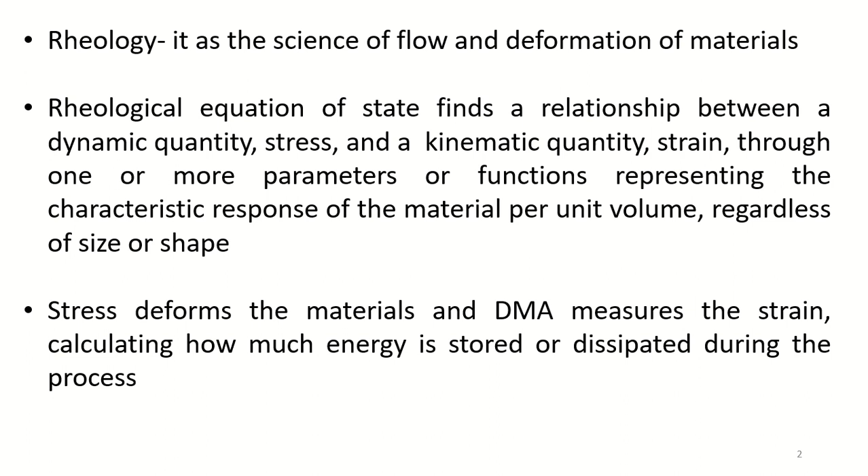Dear student, so far we have discussed some of the important aspects of dynamic mechanical analysis, in which we studied about rheology, believed to be the science of flow and deformation of materials. Then we talked about stress deforming materials, and DMA measures the strain, calculating how much energy is stored or dissipated during the process.

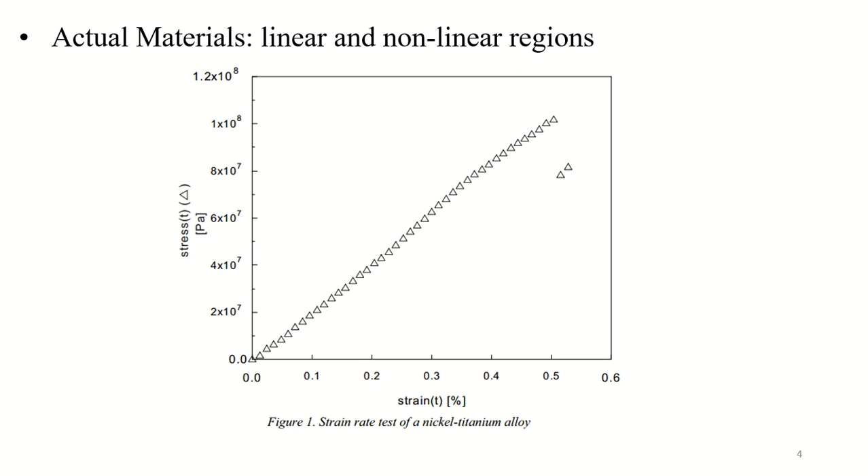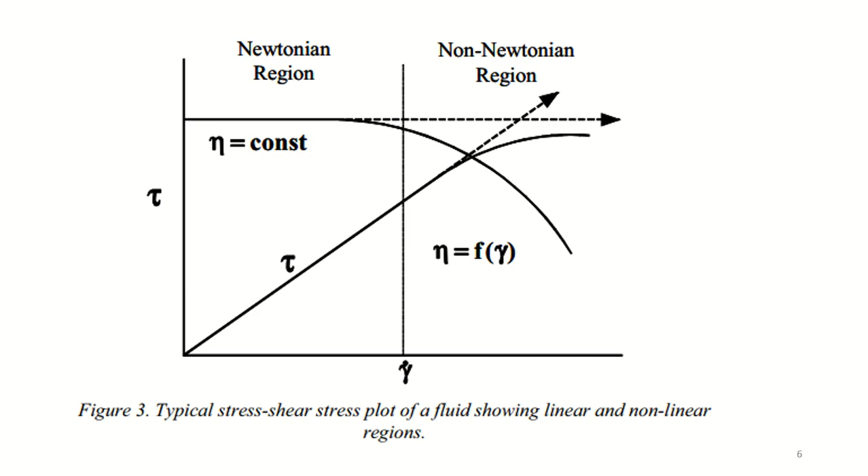In the last lectures we also talked about actual materials and linear and non-linear regions. Moreover, we saw some examples of thermoplastic polymers and typical linear and non-linear regions, non-Newtonian time-independent liquids, and non-Newtonian time-dependent liquids. Both of these terms were elaborated in previous lectures.

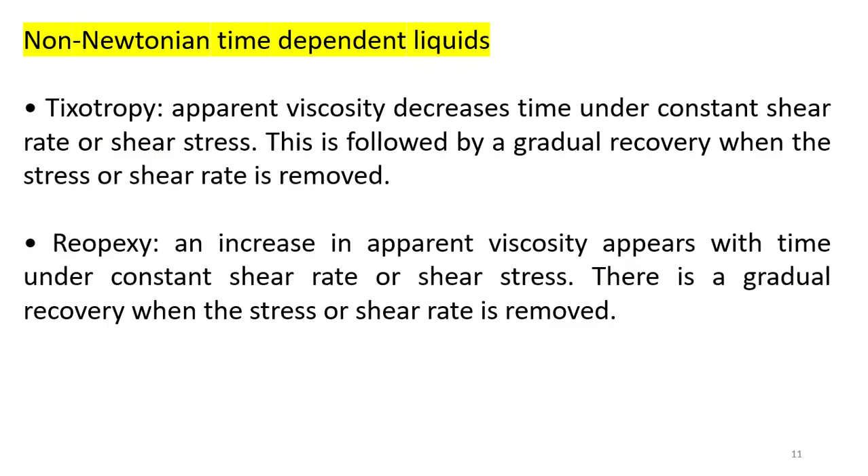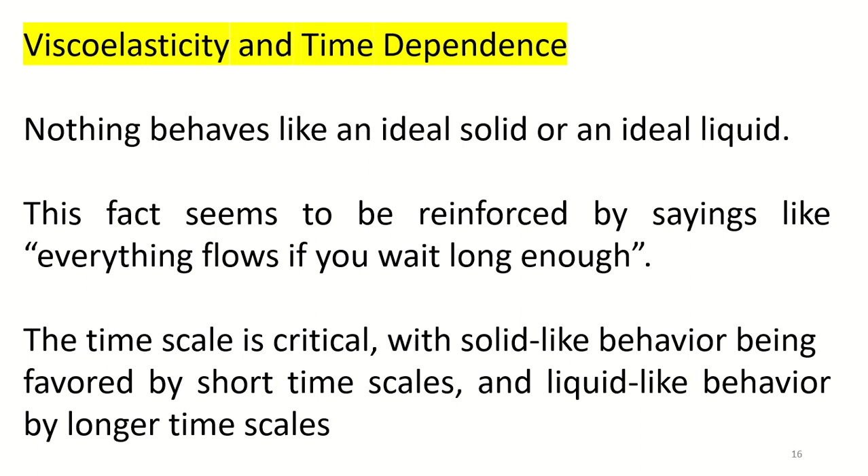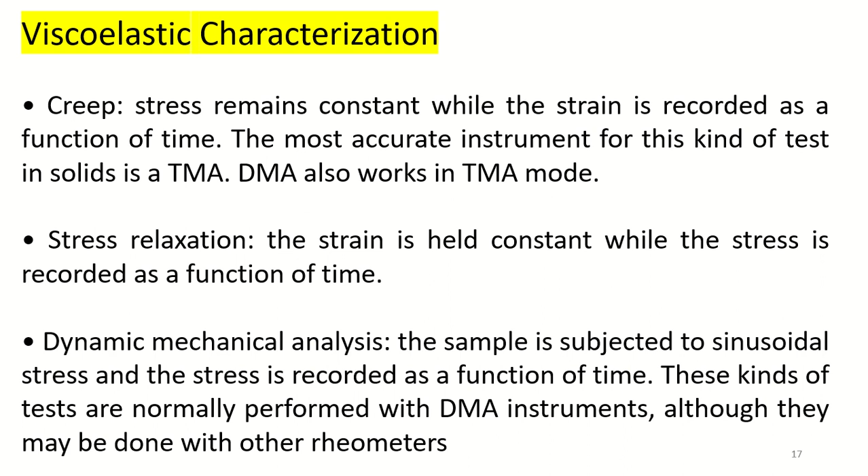The important one was viscoelasticity, which was discussed in detail, and then we talked about viscoelasticity and time dependence. In viscoelastic characterization, we studied many important terminologies: creep, stress relaxation, and dynamic analysis.

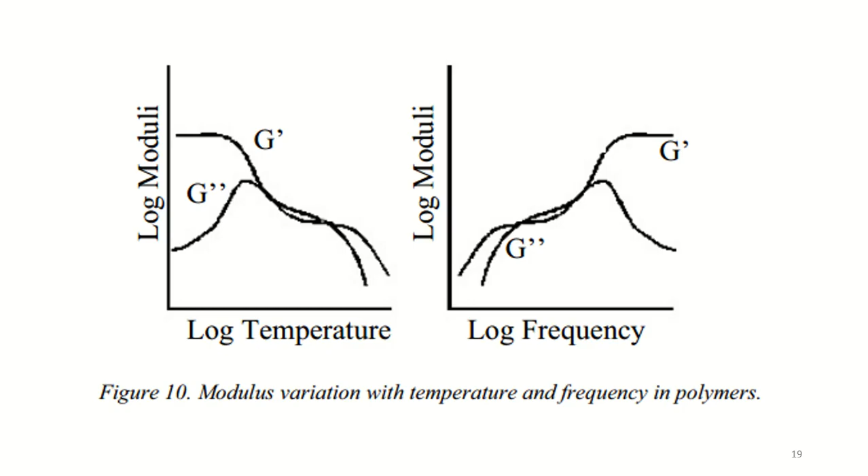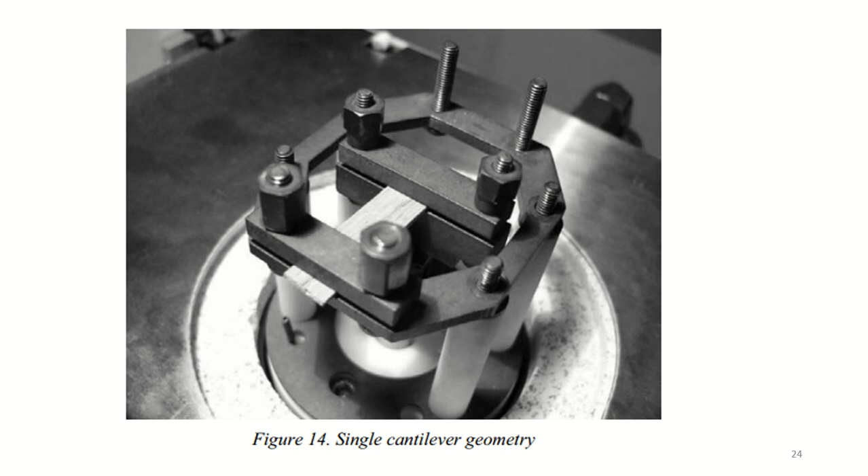Then we also talked about time temperature superposition and principles of dynamic mechanical analysis, in which we studied some instrumentation and other geometries of DMA, along with different structural aspects of the instrument, their working, and the principles behind their working.

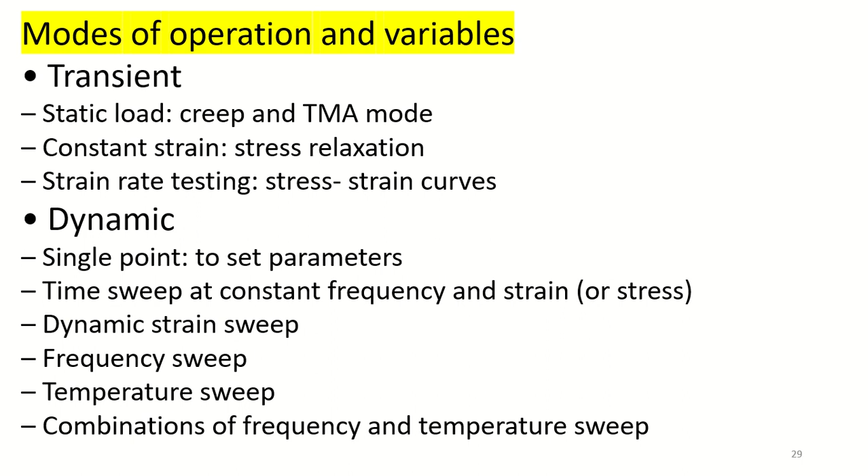Dear students, we also discussed some of the modes of operation and variables in dynamic mechanical analysis, in which transient and dynamic are most important, and we studied a lot about it.

So now we are talking about choosing the magnitude for the control parameters.

Dear student, sometimes previously gathered information may help us choose the experimental conditions for analyzing new material, so it is very important. Sometimes the previous information gathered from different sources may also help us choose the experimental conditions for analyzing new materials and for performing new experiments in the same field.

In any case, the experimental setup should take into account what parameters have to be known about the material and what the physical form of that material is. So we should be aware of the different parameters of the materials, whether physical or chemical.

So the previous knowledge and experimental information may be quite helpful for analyzing new material, and may also help us find a new route for the synthesis of any desired or targeted compound. So the knowledge of previous experiments is quite important for the discovery or new exploration of materials.

Once the geometry and operational mode have been chosen, and it is clear which parameters are of interest, it is necessary to set up the magnitude of the controlled parameters. This is especially true with dynamic mechanical experiments where one parameter should be kept constant. We should be aware, before performing the experiment, of the magnitude at which that parameter should be kept constant.

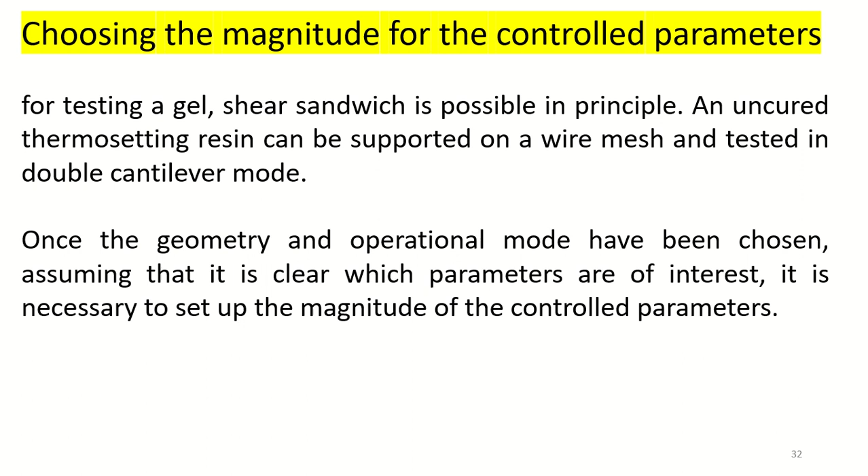To illustrate the problem, consider the case of a dynamic strain control temperature ramp test. The range of temperature of interest is constrained by the instrument's highest limit, along with the sample's features, such as its melting point. The other two magnitudes to set up are frequency and strain amplitude. We should keep in mind the instrument's temperature range, the pressure it can bear, as well as the sample's features, which most of the time means the melting point of that particular sample.

Before performing the experiment on dynamic mechanical analysis, we should keep in mind both the limitations of the sample as well as the instrument.

It is a good idea to perform two quick tests at room temperature to choose these magnitudes: a dynamic strain sweep and a frequency sweep test. The first is the dynamic strain sweep test.

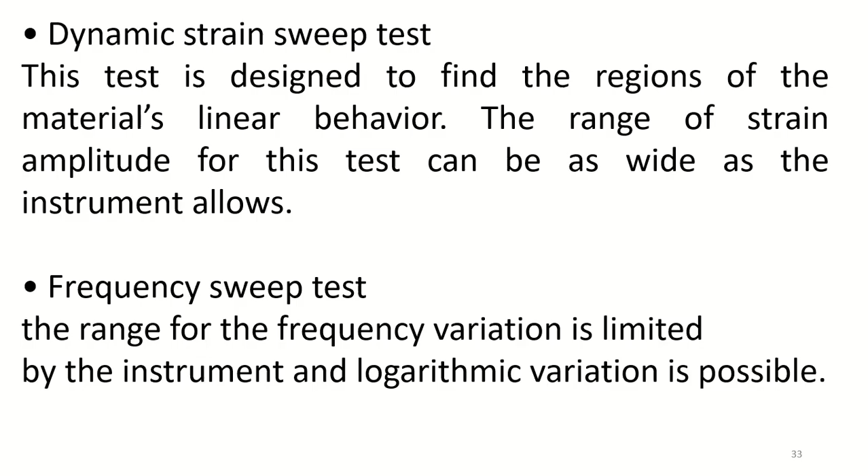The next topic is interpreting phenomena. Polymers may show several relaxation transitions along the temperature range that can be detected by dynamic mechanical analysis. These relaxation phenomena are usually characterized by a decreasing step in the storage modulus and a peak in the tan delta curve. All of these are frequency-dependent phenomena.

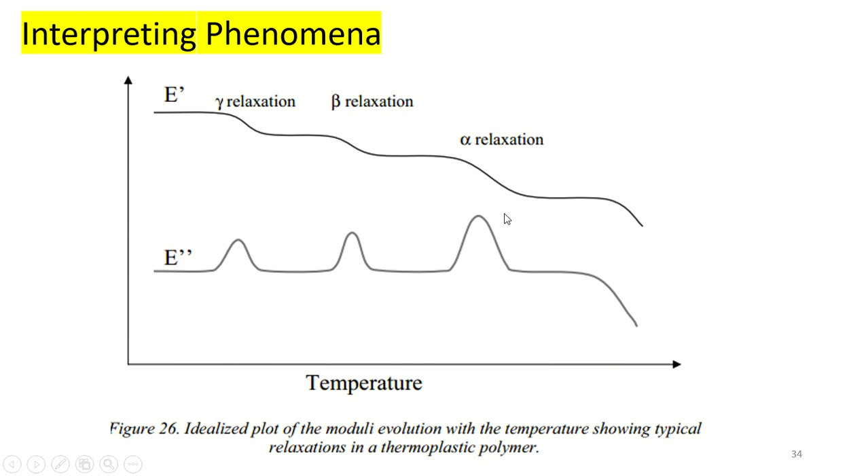Figure 26 provides an idealized plot of the storage modulus and loss modulus for a thermoplastic polymer, while figure 27 reveals the effect of an increase in frequency: a shifting of the transitions to higher temperatures.

The transitions are normally denoted by Greek symbols, which may start from alpha for the transition closest to the apparent melting process.

In the case of some crystalline polymers, it is not clear which transition corresponds to the glass transition, since certain relaxation phenomena involving chain segments or slippage between crystallites may happen inside the crystalline superstructures. At temperatures between Tg and Tm, these strongly affect the properties within this temperature range. So the sample shows multiple phase transitions, and we are unable to distinguish which transition should be the Tg, or glass transition.

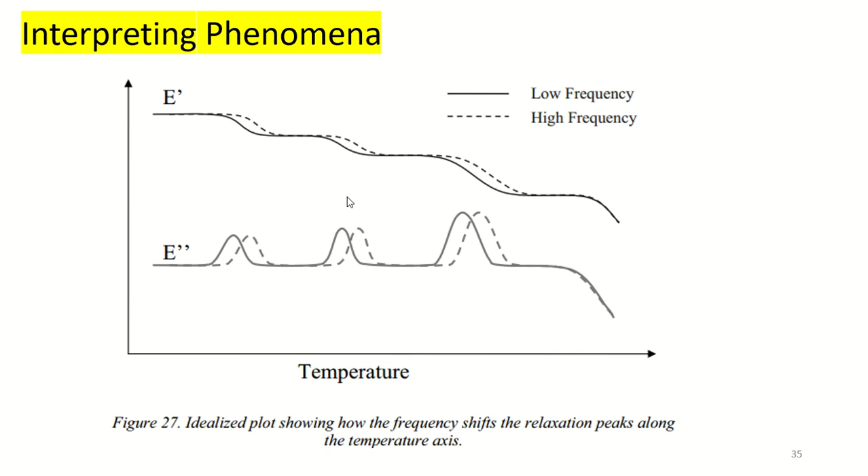Now let us talk about the applications.

Determining the mechanical properties such as storage modulus, loss modulus, and loss tangent of materials over a spectrum of time or frequency, as well as temperature. Although there are many quantities which can be determined by dynamic mechanical analysis, knowing any two allows one to calculate the remainder.

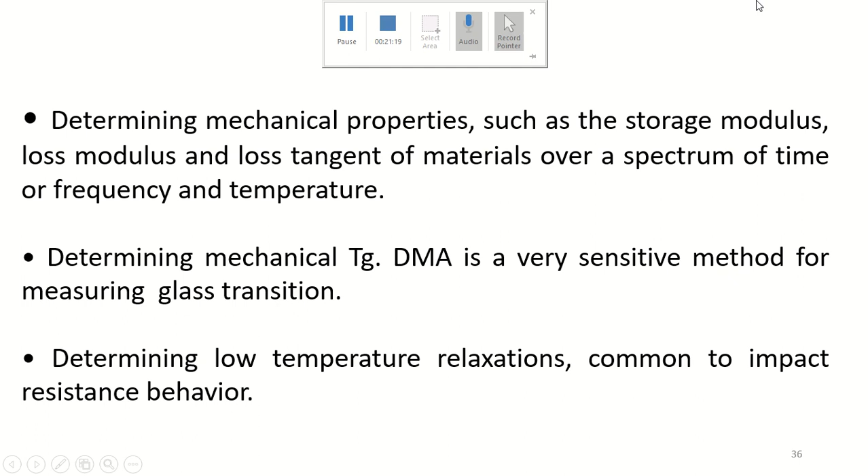The second application is determining mechanical glass transition, denoted as Tg. Dynamic mechanical analysis is a very sensitive method for measuring glass transition. It is specially indicated for some polymers that show a slight change of heat flow at glass transition Tg, such that it cannot be seen by differential scanning calorimetry (DSC). The reason is that their content in the amorphous phase is small. Nevertheless, even in those cases, the stiffness changes sharply at glass transition.

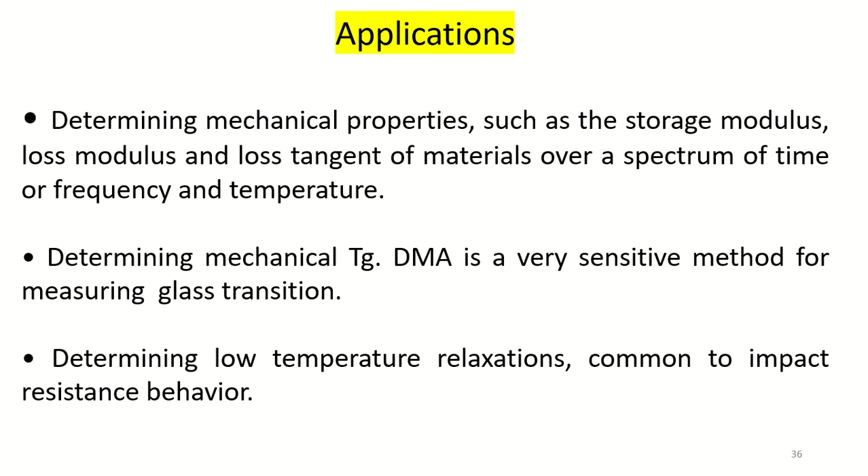Determining low temperature relaxations common to impact resistance behavior. The fourth application is actually predicting long term mechanical behavior. The fifth one is analyzing thin samples, fibers, and supported systems.

The high sensitivity of dynamic mechanical analysis for measuring stress and strain means one can analyze samples where very small forces are involved. This is the case of fibers and films.

For non self-standing samples, it is possible to use a support material. The support should show a constant storage modulus throughout the experiment and a very low loss modulus. Some classical forms of support include a wire mesh or a thin glass plate.

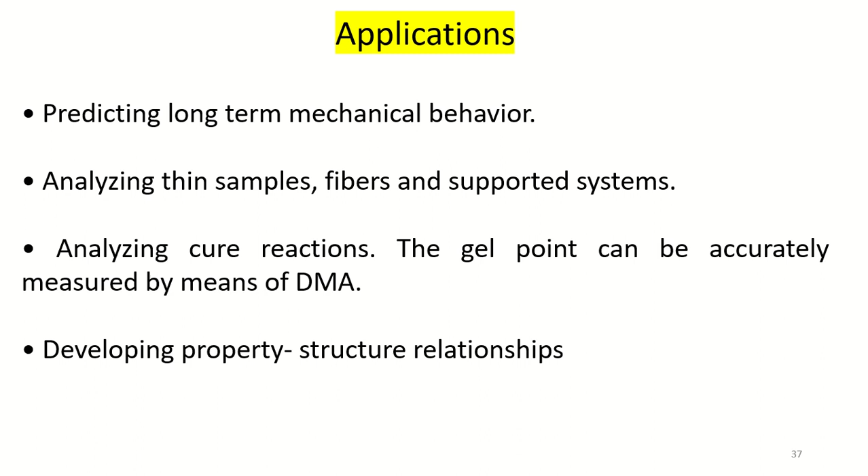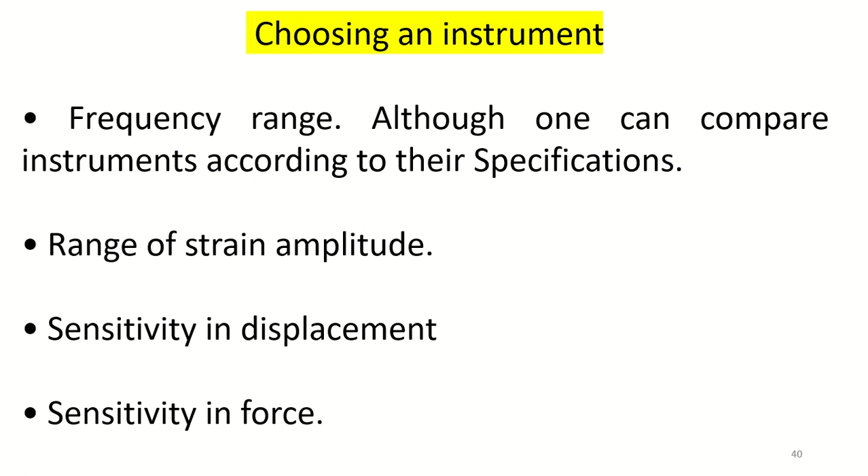So how can we choose an instrument? Features that should be taken into account for choosing an instrument should be the frequency range. Although one can compare instruments according to their specifications, it is important to note that very low frequencies are not commonly used overall since they are time consuming and do not report practical information. The second feature is the range of strain amplitude, the third is sensitivity in displacement, and the last is sensitivity in force.

This is all about the fundamentals of dynamic mechanical analysis. Thank you very much.